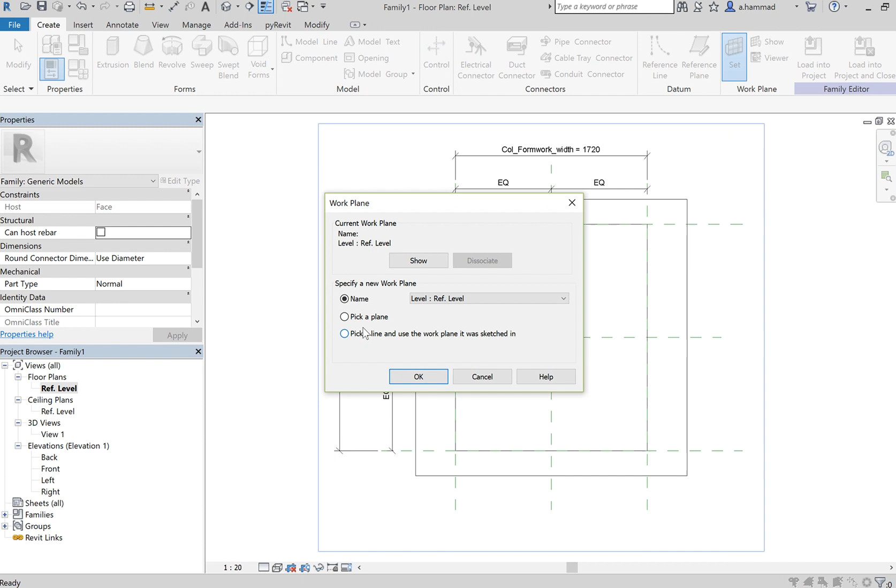So to do that, again, we go to create. Before we create these braces, we want to make sure that we create them on top of this surface. So let's go to set. This sets your plane. Click on pick a plane and then choose that object. Just click on it once, and now we're ready to create the braces on top of this plywood.

So again, rectangular. Now let's have it as maybe, I don't know, 200. We can change the dimension if we want to. And before you click on the tick, make sure you lock these, so we want the braces to sort of be locked between these two reference planes. Click on the tick.

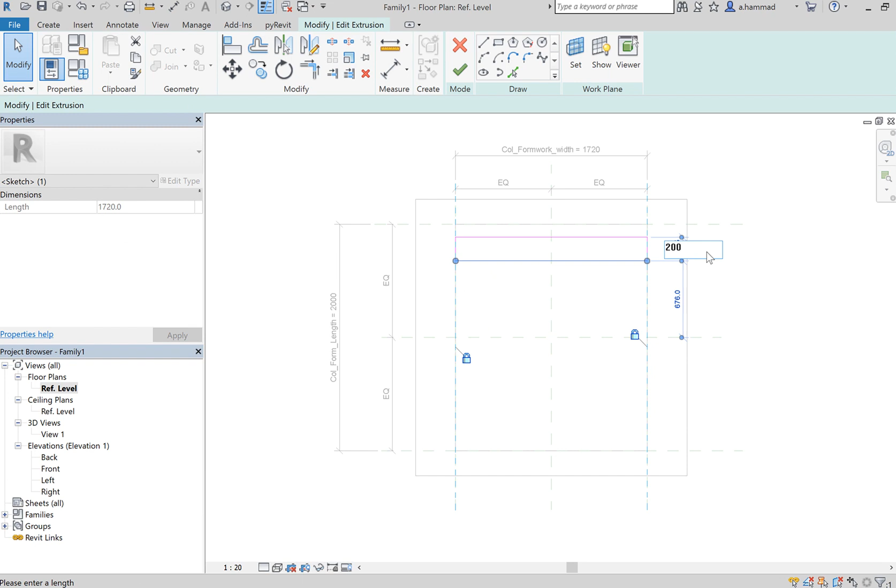And as I said, if we wanted to change the dimension, we should double click on the brace, say this is 200, click on OK. So now we've got our first brace, and let's say we want this to be a certain dimension away from the edge from here.

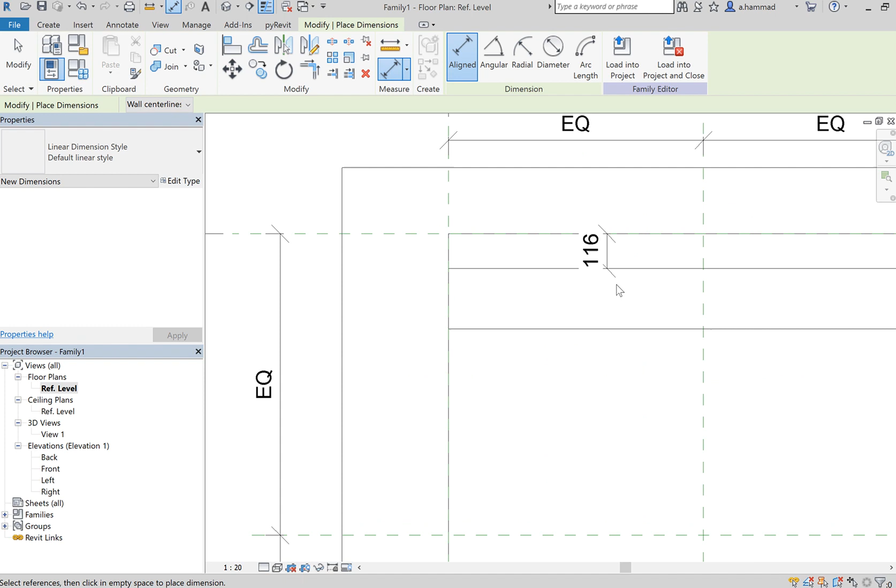So to do that, we dimension. Click here, click there, and lock that. Oh, before you lock it, sorry, let's change that. Maybe you want that to be about 150.

Okay, so now you should lock it. And the reason we lock it is because we don't want this to change, so we want this brace to remain at 150 from the edge.

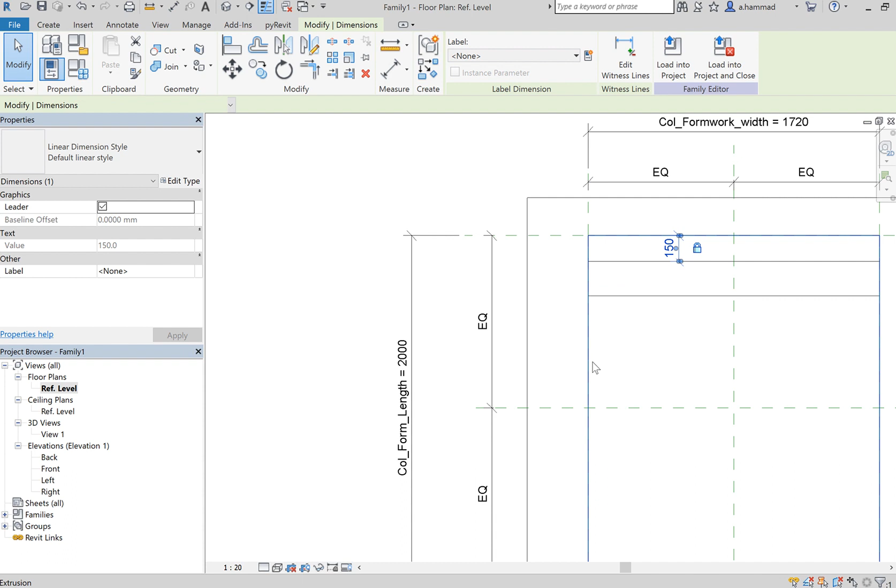Now the other thing that you can do is you can create another two braces. Again, we want to create one in the middle and one at this end. So I go to create and extrusion. Click on that.

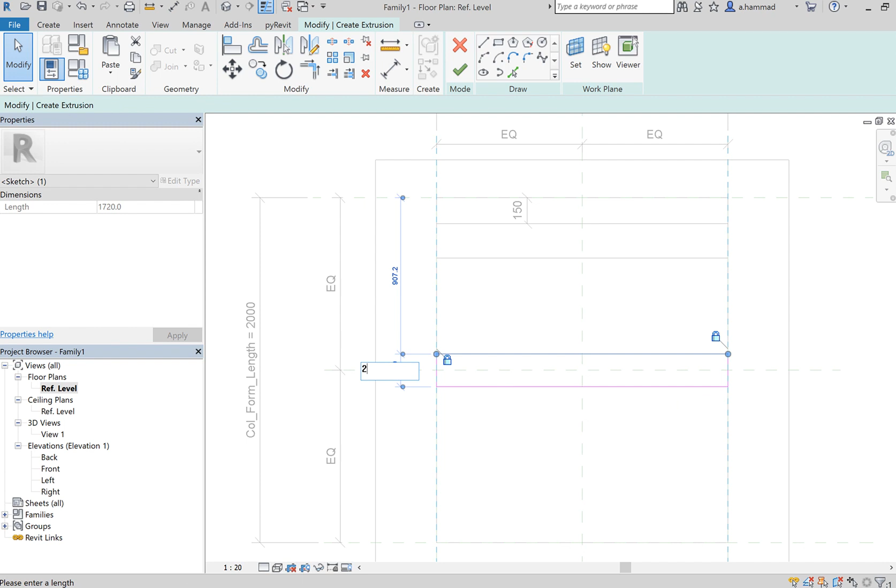And again, we'll lock these, and let's change that to 200. And click on the tick.

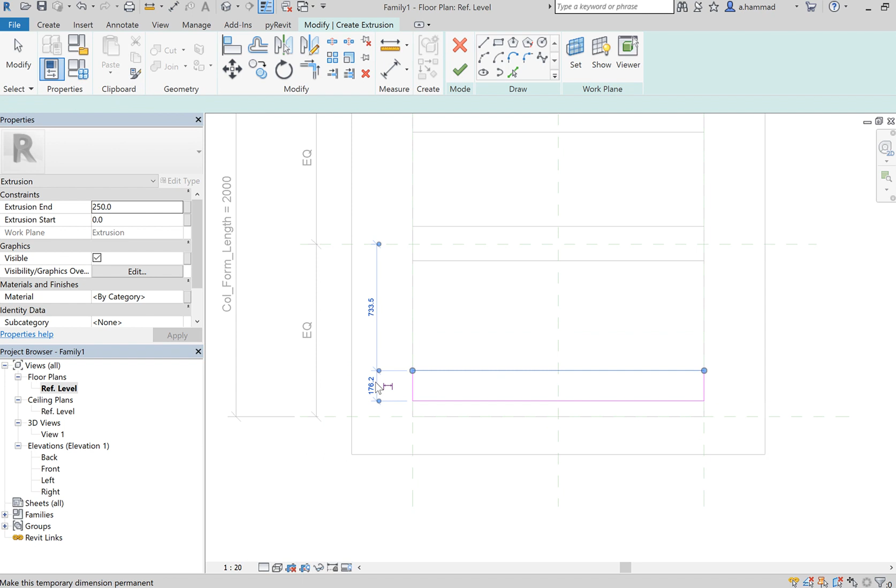And let's go and create the final one. So again, create, extrusion. And let's make that 200.

Click on the tick. So just like we did with this one, we want to dimension that as well, so that it's at 150 mil away from the edge. So 150.

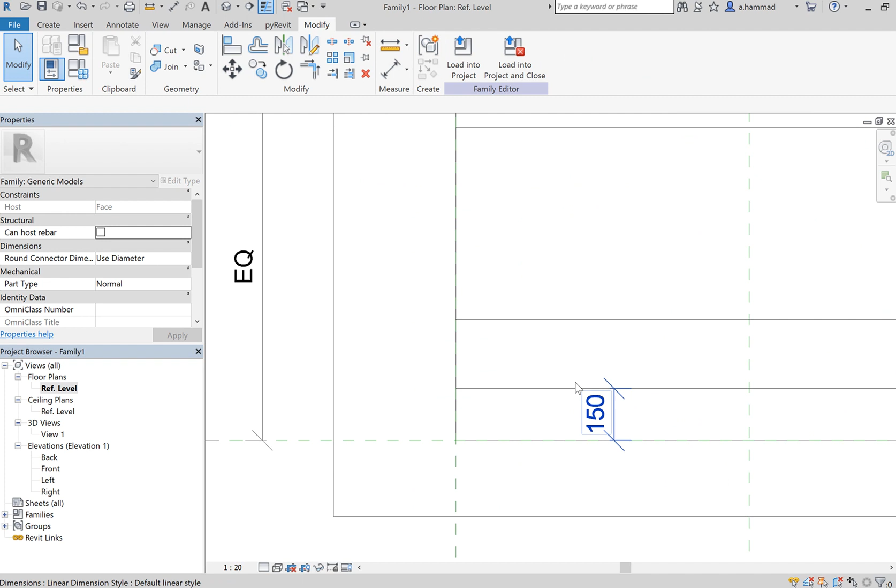Notice how if I wanted to change the dimension, I've got to select the object. So once I select the object, I can see the dimension, and I can play around with it, set it up, and it should shift that object away from that edge. Now again, don't forget to lock that, so we don't want that to change.

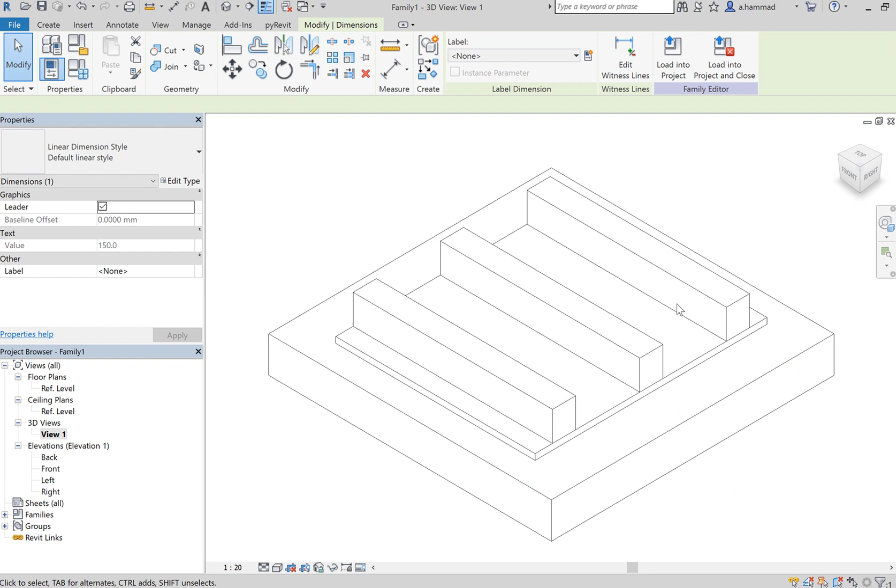So if we go to our 3D view, notice how now we have these three braces. Now they're a bit too big, so we should reduce their depth. So maybe go with, I don't know, 20. And this is how the object, our plywood object, looks like. So we've got the sheet, our plywood, and we've got the braces attached to the sheet.

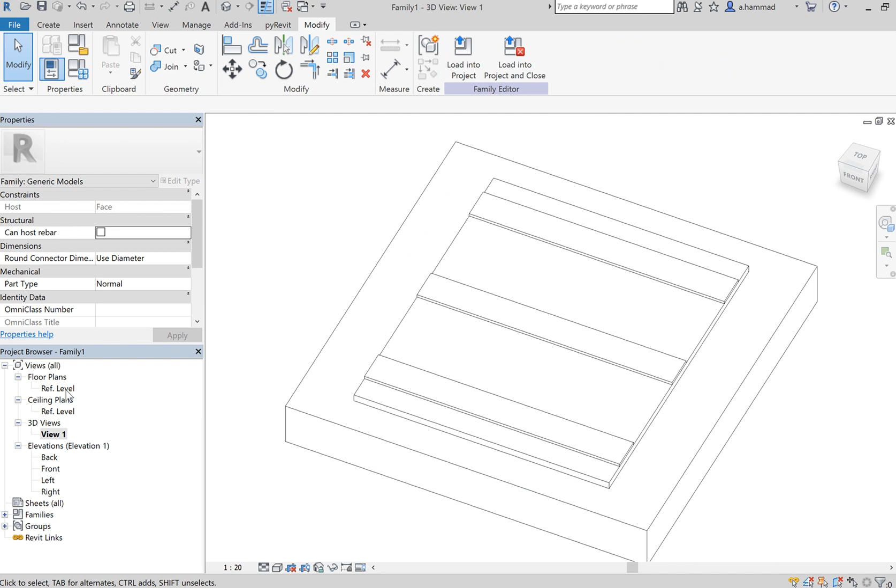Again, in the next video, I'll show you how to dimension the width of these braces, and also how to control the positioning, so that the braces remain in the same sort of position even when you increase or decrease the size of your plywood.